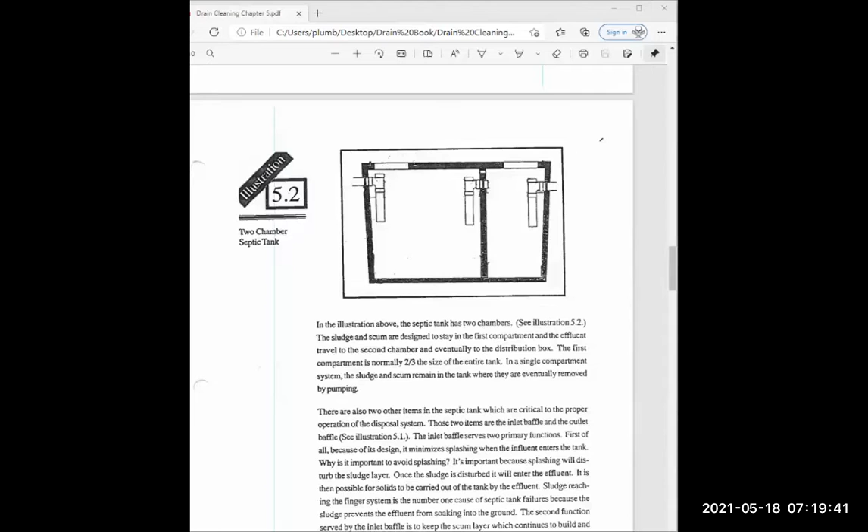A lot of times what happens is the solids have overcome the exit, and so the problem is now you're not leaching out the liquids. The customer has waited too long to pump the tank, and so now potentially the problem could just be a full tank. The call at that moment would be to call somebody out to pump the tank. So you see on the diagram, look into the... yeah.

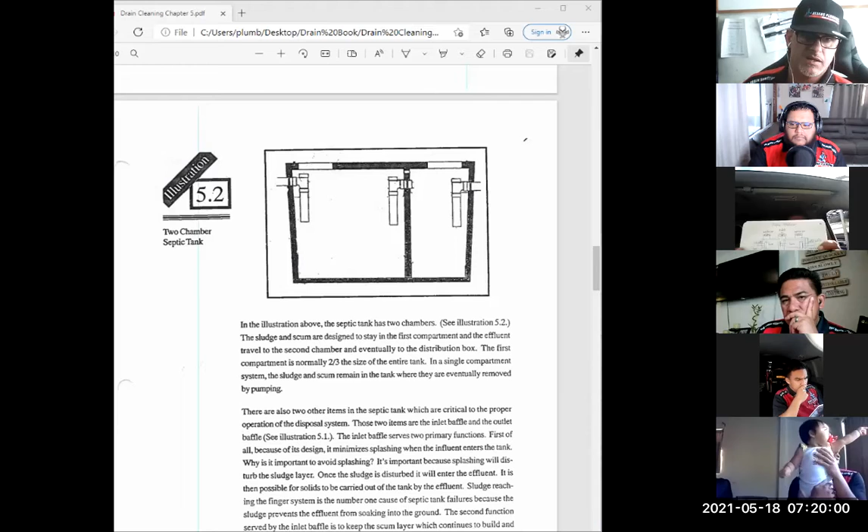You see how, because water seeks its level, right? So the whole objective is water to rise from the pipe on the bottom, on the left side. Josh, put your pointer on that thing. Where do you not want to see it go over? There, you see that section? So once the water or solids rises to that point, you already know you have a problem, because remember this term: water seeks its level. So if the mantle or the solids is above that point, you already know the exiting pipe is consumed with solid, and therefore no more liquid can leach out.

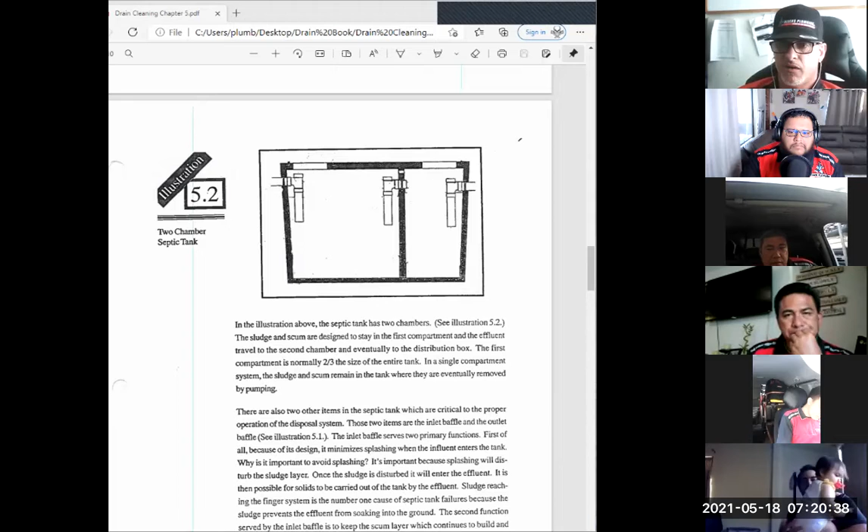You guys all follow me? Anybody have a question right now? If you have a question, please ask. Connie, you got a question? Something... no? Okay.

Do you guys understand what Ken's saying? So when this is your inlet to your tank, these are the outlets. Whenever you see the water at this level on your septic, you see the pool of water just sitting right at the base of that santee, you know that it's not full yet. It's still got room - once it rises above the top of this santee and you can't see the baffle T, you're dealing with a full septic.

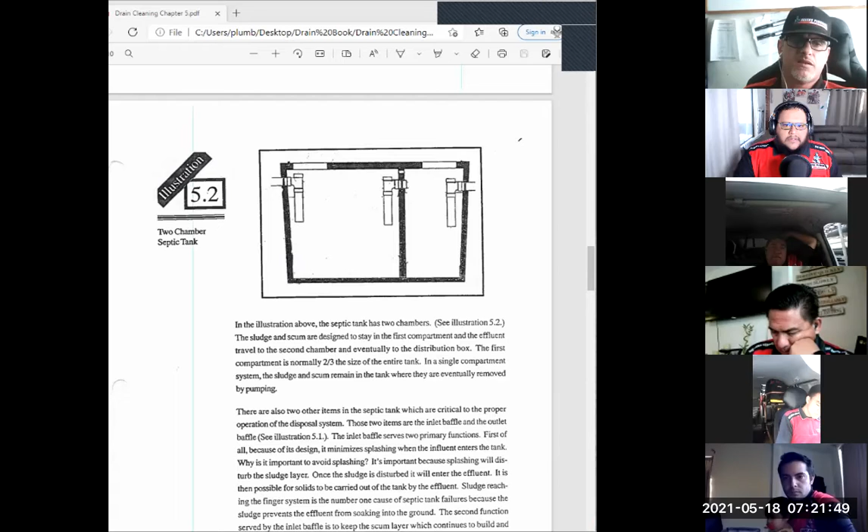And then at the end here, if you look, these are all lower than the inlet. They're brought in lower on a septic system. So it comes in layers. Sorry, hold on - oh, what the heck is that? I might have confused you guys. I was looking at the left one as the exit, and that's my fault. So what Josh is saying is correct: the inlet is on the left, exit on the right. You continue, Josh. Sorry.

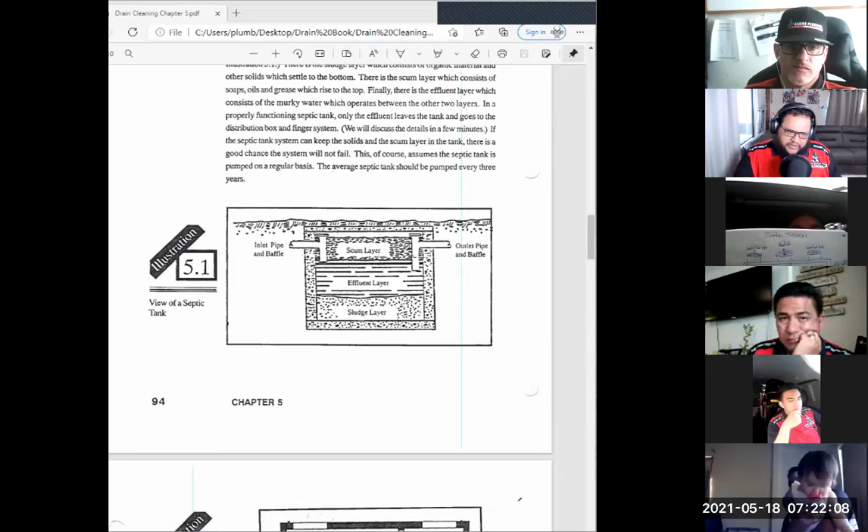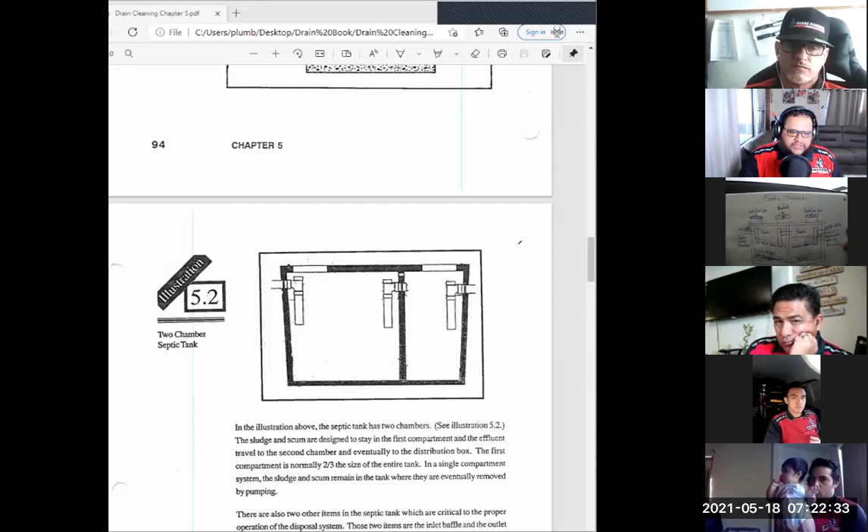So you have a scum layer, effluent layer, and a sludge layer. The scum layer is your grease, fats, oils, and stuff. This middle area right here is just supposed to be straight liquid, and then your solids and sludge sink down to the bottom. So if that water level is above your santee, it's full. All these santees on your right, which is the exit side, go to the effluent tank and then leach out to your distribution box and out to your leach field. So if you could see this T, you're not dealing with a full septic. If you can't see it, you are.

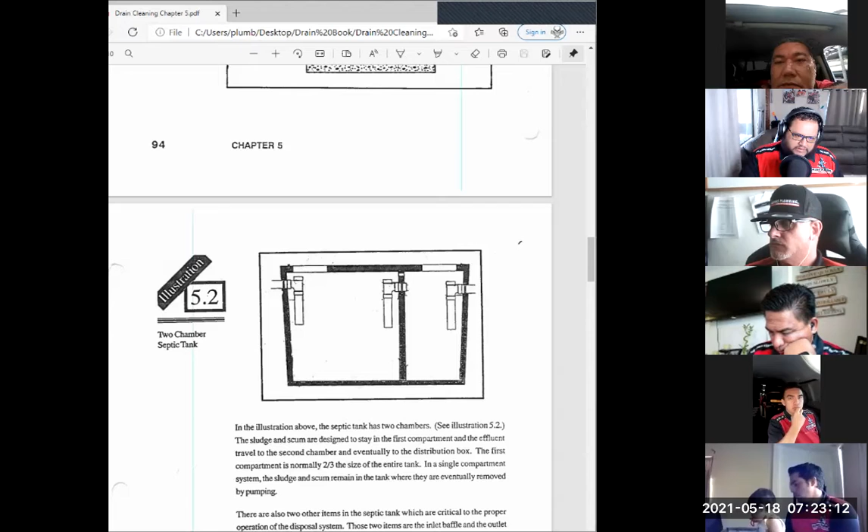I know a lot of guys get confused, thinking the septic's full because they see the water level two feet from the bottom of the cover. It's not necessarily full, and we get a lot of kickbacks from customers saying, 'I pumped my septic and my line's still backed up.' So it's very important that you guys understand that just because you see water sitting at the bottom of this santee does not mean that it's full. This santee here has to be fully submerged, or water coming through this cover, to know that it's full.

I just worked on one, Josh, and it didn't have baffles and pipes like we normally see. It was just a hole at the first chamber. It had 3 chambers going from the first to the second - there was a hole on the bottom, and then on the second chamber to the third there was a hole on the top, like it was naturally separating. I don't know if that makes any sense. But does anyone know why they put baffle T's in there?

So the reason why they use Sanitees is it's a breaking point for water entering the septic tank. It doesn't cause disruption, because if this was just an open pipe, the water would just pour on in here and break up the sediment or the layers that you have in here. So this is more like a splash guard, keeping all the sewage and everything entering the tank from just mixing up the whole time.

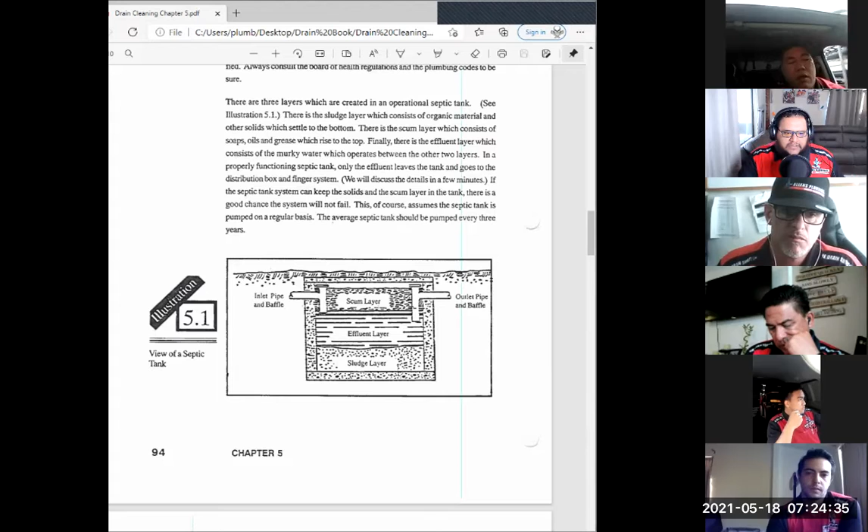So this kind of keeps it settled as it enters the tank. The solids are going to hit the back wall here instead of hitting this grease layer or the effluent layer. Sometimes it'll sit here, but eventually it'll sink down, and everything will go to its place.

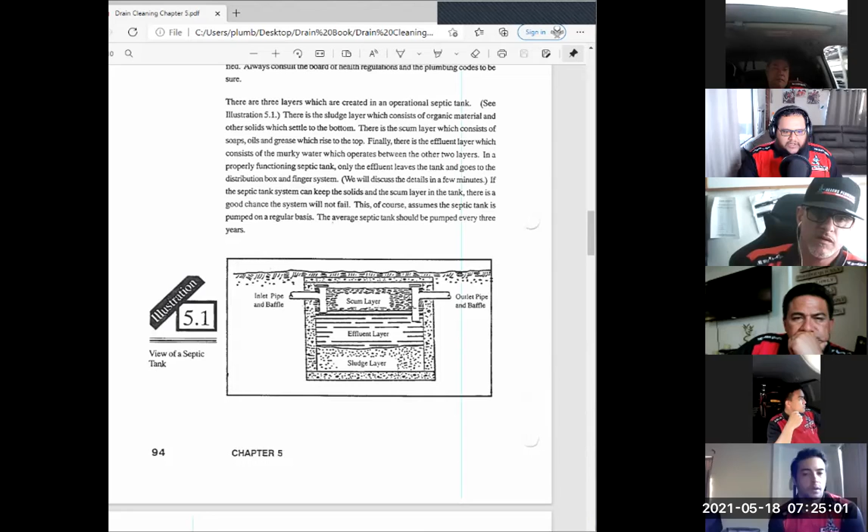So that's the reason why they use baffle T's or Sanitees in the septic and the release of the septic, so that when water's rushing through here, it's not mixing everything up in the tank and causing disruption to what the septic is made to do, which is separate and release.

And a lot of them have chambers, so you see the chamber in the middle. What that does is it gives you stages too. So if the first stage is full, that's something that can be concerning. But if your second stage is full, and going to what we're discussing, we've determined that the distribution box is not getting liquid in it, and your second stage is full, we got problems, right?

So let's just say now we've called the septic guys, they come out, they pump the tank. Tank is empty of solids, but you're still not getting effluent or liquid flowing from the exit into the distribution box. Preston, what would you say is the problem?

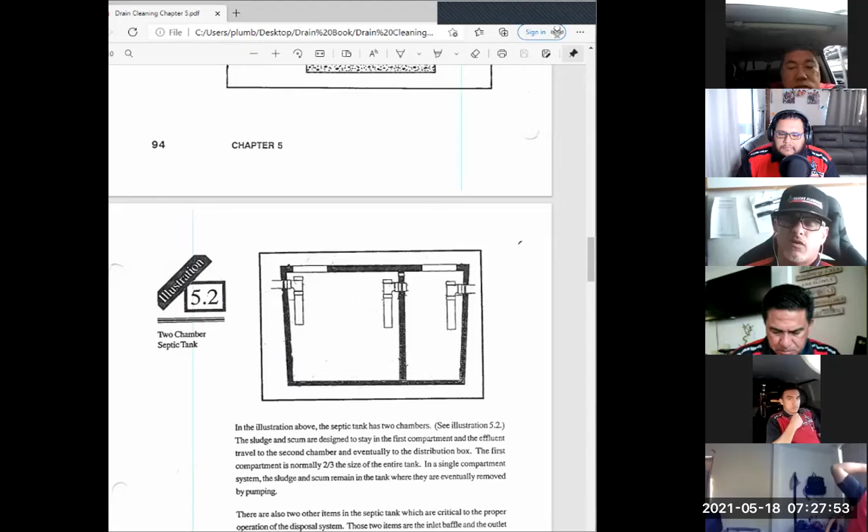So I have a question for, let me see. Jonah, what kind of products now should you recommend to the customer? What can you recommend to the customer as far as any kind of maintenance or service for future work on his septic system that may help this problem from reoccurring in the future?

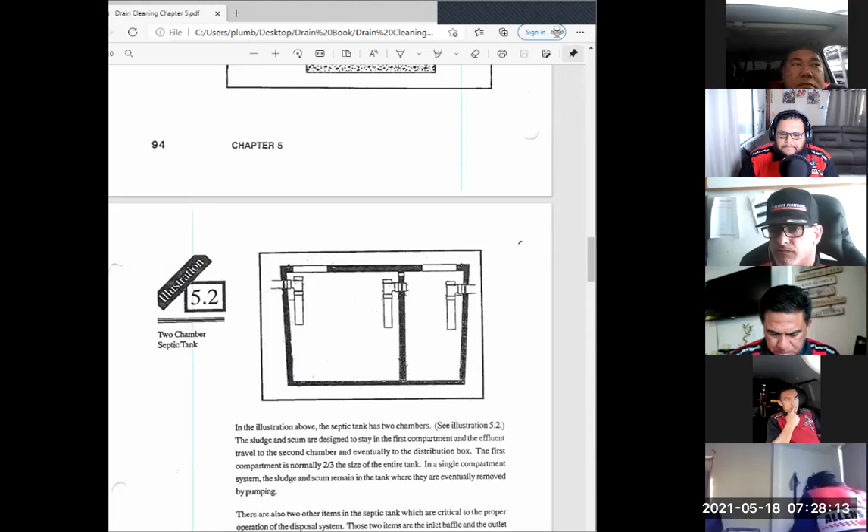Would a live enzyme help? I would say an enzyme would help, but probably a live bacteria would be better. Okay. And that's a great suggestion.

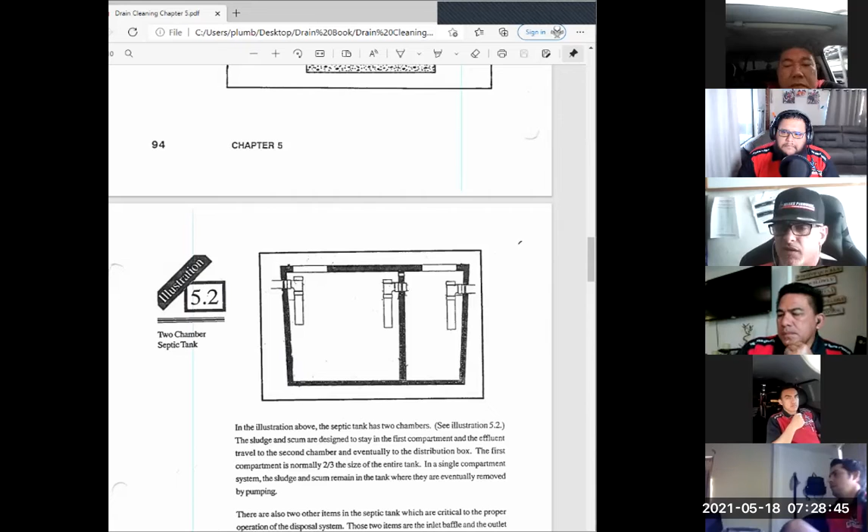So, on average, Josh, what is the average amount of time on a basic, let's just say 3-4 bedroom household, if I have a septic system? How often should I be pumping that tank? So the rule behind that is they want you servicing or pumping your tank every 3 to 5 years.

And I'm going to say it's based on consumption, the amount of consumption that's happening. So if you have a basic 4-bedroom home, and let's just say you have mom and dad and your 3 kids, so you have a household of 5, that's one thing versus having families now living in a single home like that, and you start adding to the equation.

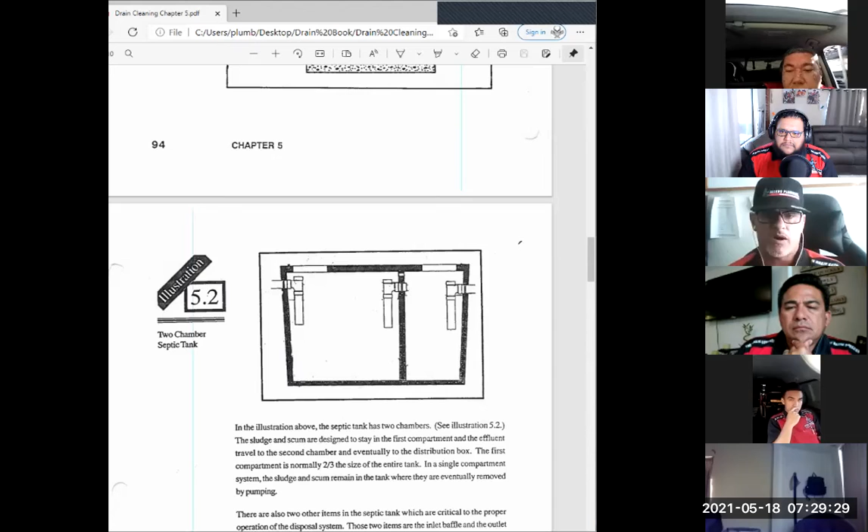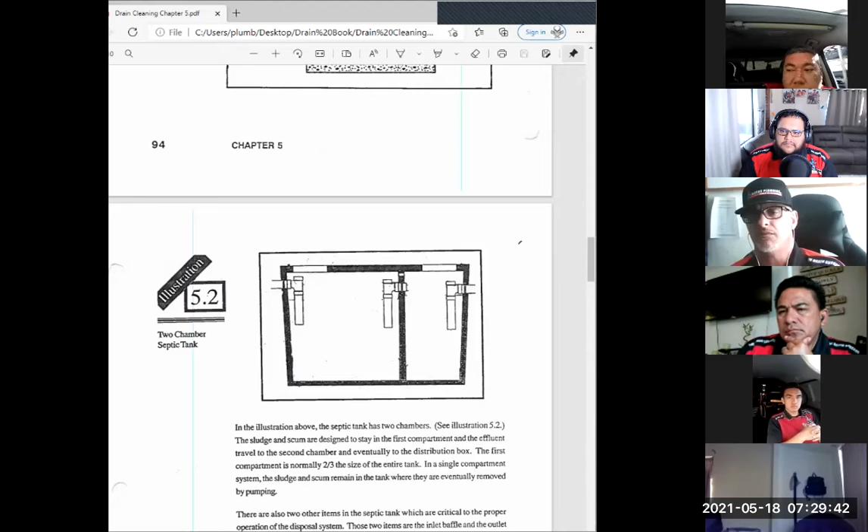That average is based on an average household. So if you're there and you're noticing, wow, there's a lot of people that live here, you've got to start playing detective and asking a lot of questions. So if the average is, let's say, 3 to 5 years, and now instead of having 5 people there you have 10 people, you could do the math on how often that tank should be pumped out, and those are the things you should educate your customer with.

The other thing is, I don't know how often you guys are dealing with BioChoice, Bennett, on Oahu. You guys still have BioChoice there, yeah?

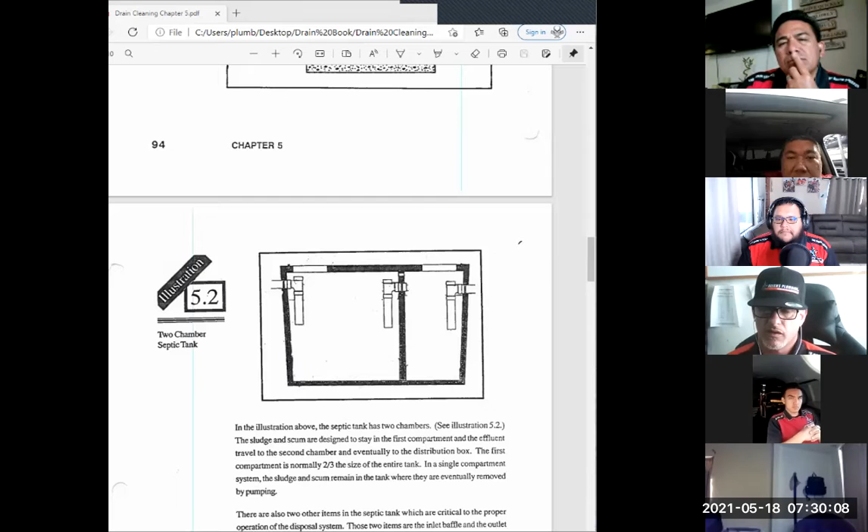Are you guys recommending BioChoice when dealing with kitchen sink stoppages, grease, and septic systems? Yes, that is a live bacteria, but it's not an enzyme. They're two different things. An enzyme will reform later on down the line.

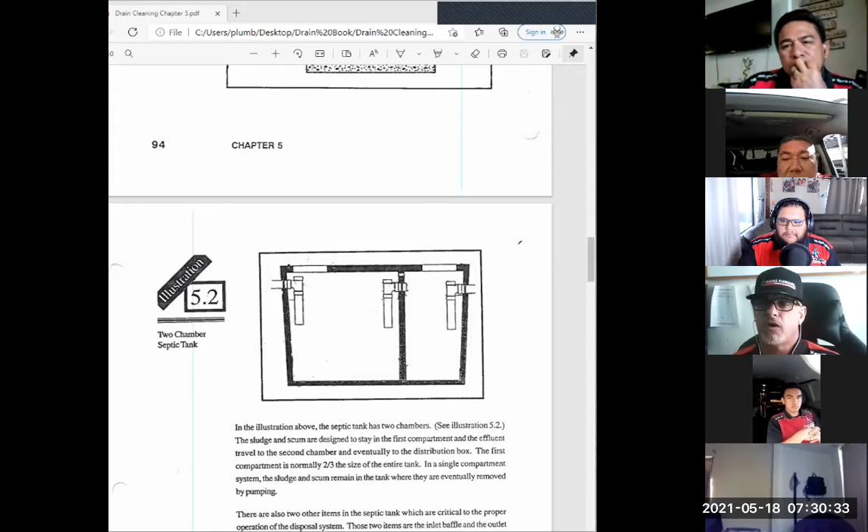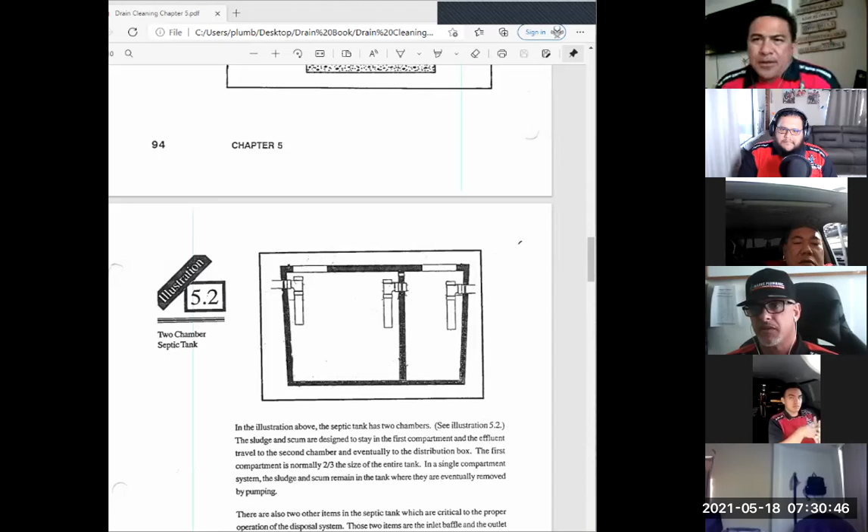Connie, can you give some information regarding BioChoice and the difference between BioChoice versus an enzyme? So Bio One or BioChoice is a product that has 100% bacteria. It doesn't require enzymes to break down fats, oils, grease, or solids. That's what an enzyme does. We all have enzymes in our body, but it's a component that breaks things down so bacteria can consume them. The bacteria in Bio One doesn't require that because it's manufactured to do so on its own.

So the challenge if you just get an enzyme product, because they do sell just enzyme products, is it does exactly that. It'll break it down, but if there's nothing there like live bacteria to consume it, then those items will come back together and reform further down the line. In municipals, that's a big problem, which is why they don't endorse enzyme-only products. But for some reason, they're still sold.

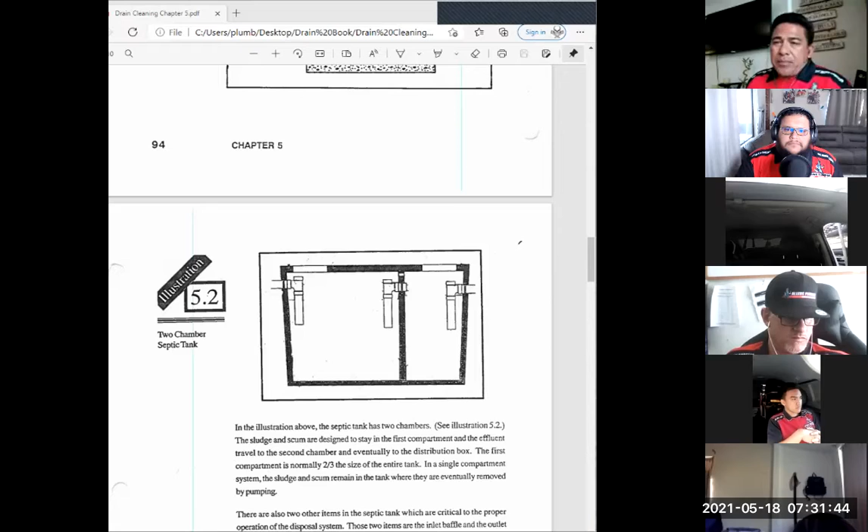Now I wanted to ask this question for Josh and Ken, and I don't know if we have the answer. I know the idea is 3 to 5 years to pump a septic system, but I'd assume that's a system that hasn't been treated with a bio product. If you suggest using Bio One or BioChoice, they could probably eliminate the need for pumping out their system as often as every 3 to 5 years.

So I believe 3 to 5 years is for an untreated system, something people kind of ignore, and then they have to pay $500 to $600. I don't know what it is now, it might be more due to the cost of things, maybe $700, $800. It's a good question to ask your customer: how often, when was the last time they pumped it, and what was the cost. But a treated system, I believe, shouldn't have to be pumped ever.

I'd say something regarding that. So if you're trying to educate your customer, the worst thing that could happen besides their line backing up would be their leach field failing. A leach field fails because they're constantly allowing their tank to remain full. So what happens is a lot of the solids will eventually keep passing by until it just backs up and plugs up 100%, and then there's nowhere for it to go.